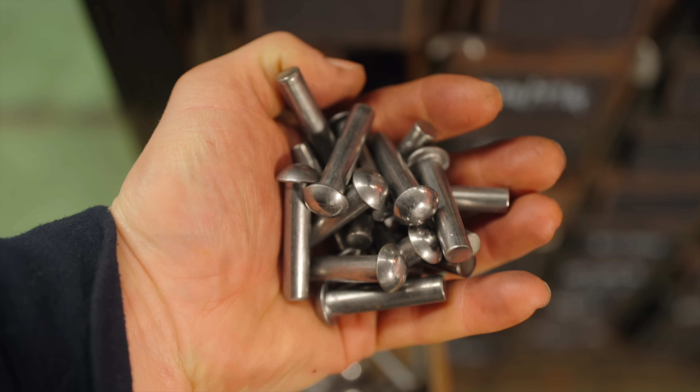The rivet is hidden in plain sight, but holds the world together. And I have been fascinated by them ever since I was a child. I remember walking through train stations, walking across bridges, looking at the structure of buildings, and being entranced by the millions upon millions of these that held together the structures of the past.

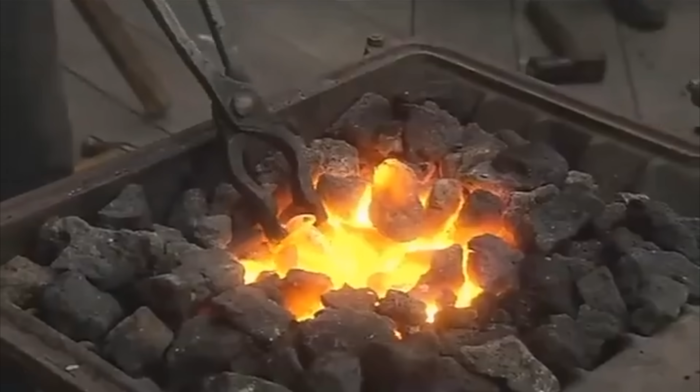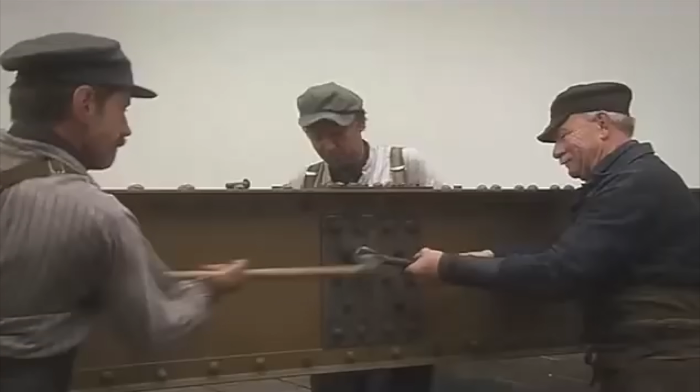As a young blacksmith, I first made them for the pivot on my tongs, but I always wanted to learn about how they were used in an industrial, structural way. I remember being completely entranced watching a documentary about how the Eiffel Tower was built. One chap on the floor below heating up the rivets in a forge, throwing them up to the team up high, and the heads smashed over with sledgehammers. And as time went on, it went from rivets being set with sledgehammers to hydraulics and pneumatics.

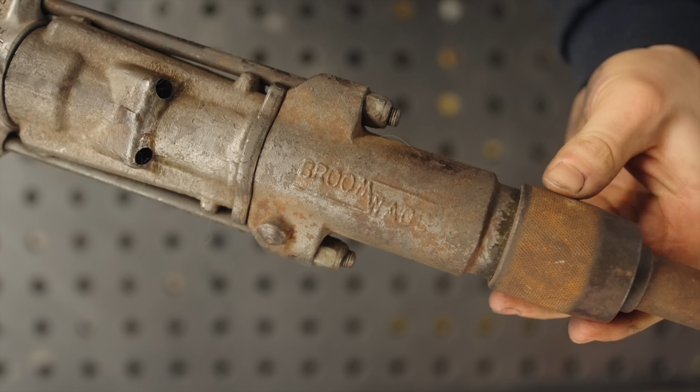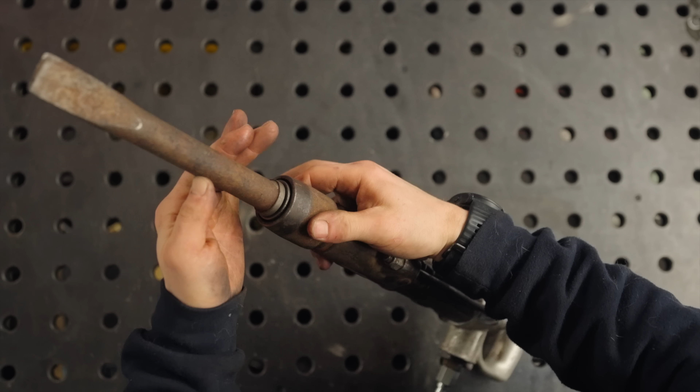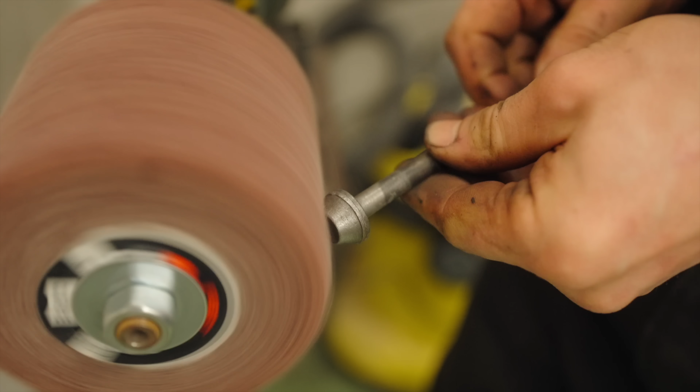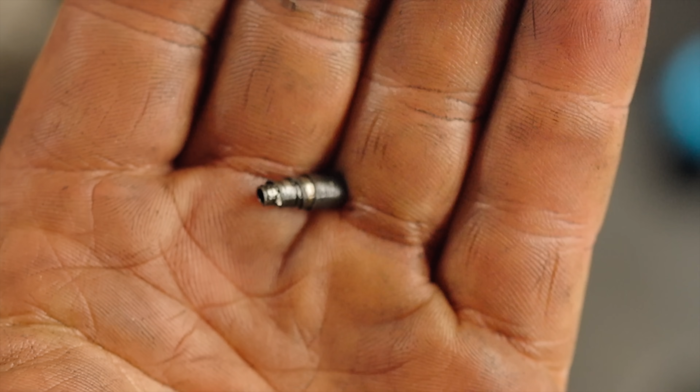Say hello to my little friend. I've been hunting for one of these for a long time. This is a Broomwade pneumatic hammer. Admittedly, it looks a little bit bigger in the pictures than it is in person, but I want to get this thing restored, up and running, and build the tools that we need to see if we can make rivets like they used to back in the day. Press this, chisel comes out. Feels remarkably smooth for its condition. Ooh, the insides feel good. No way. The springs are little spirals of flat stock.

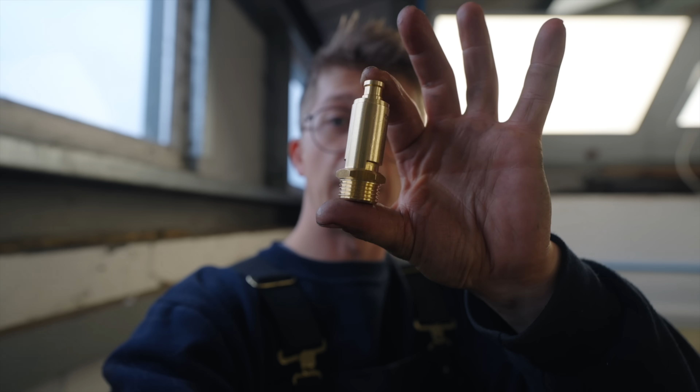It's cleaned up, and we've got to find out if this thing works, which is why I'm sitting on top of the compressor, because we need air, and you guys very kindly told me in the comments of our steam hammer video that the pressure relief valve I put on the receiver tank was too small, and so I purchased a much bigger one. I'm always very grateful to be learning from you guys. Turns out a pressure relief valve needs to exhaust more than the compressor can produce, which frankly sounds incredibly logical, to be fair.

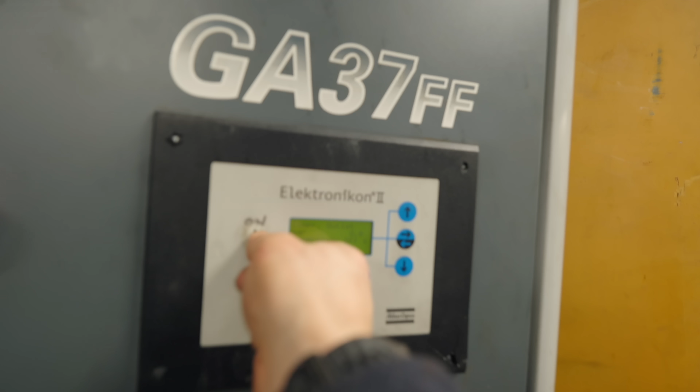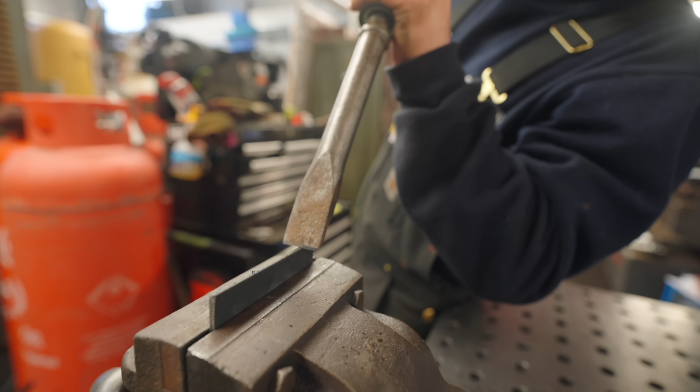And on here, on there. Sharpen this up real quick. So let's see how this thing performs as a cold chisel before we transform this into a rivet hammer. On with that. Oh! Say hello to my little friend. Oh, that's done nothing. That's pitiful. What? Not doing any hammering. Maybe I assembled it wrong. I think we've got to disassemble it.

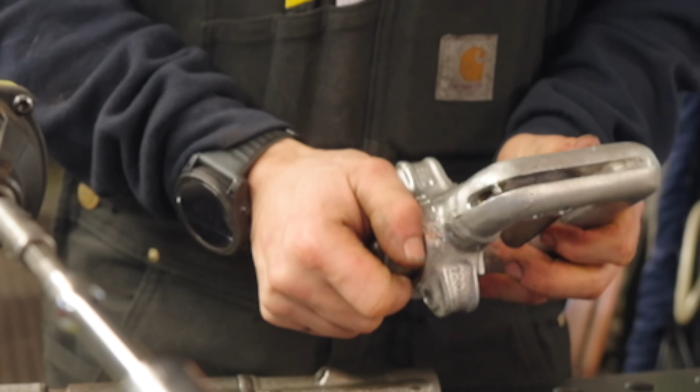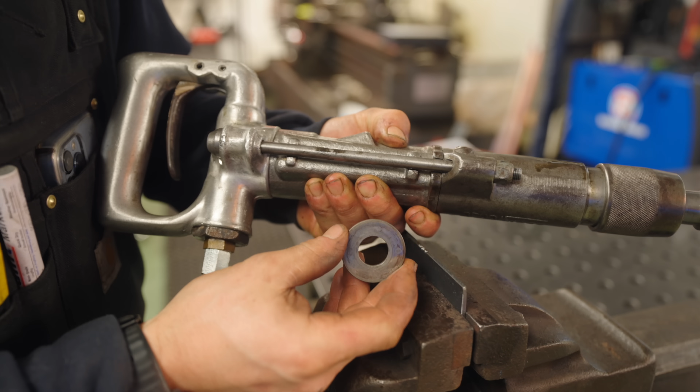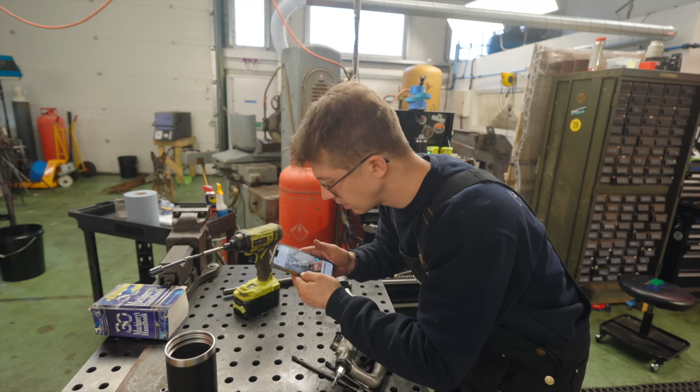I looked at the pictures. I think this needs to be turned like that. I have no idea if that's any different. It's not doing anything. Oh no! I put it together without this! That should be inside of there. That goes in there. Oh no! Boom. Take 3. Ah! Even worse! Try again. I'm looking at the pictures I took. I think I have it all together backwards.

I just found one of the little, I dropped it. One of the little ribbon springs that we saw earlier has broken. I don't know if I'm gonna have anything that'll replace it. Childproof containers. Oh my goodness. Definitely don't have anything that's gonna bloody well replace it, do I? None of these are gonna fit. That's not gonna fit. Nope. I think this spring is about to go as well. All right, how about this then? Will this work? Will it work?

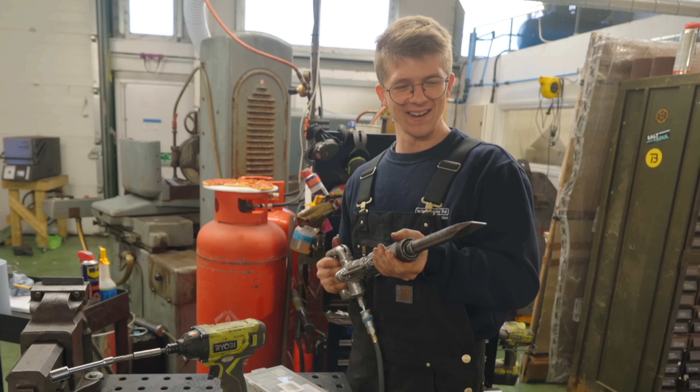Oh! That sounds more like it, baby. That's what it's meant to sound like. Look at that thing. That is a special type of feeling. The only thing it's missing is the smell of gunpowder. It hammers, and in its current state, chisels with some oomph. But is it enough oomph?

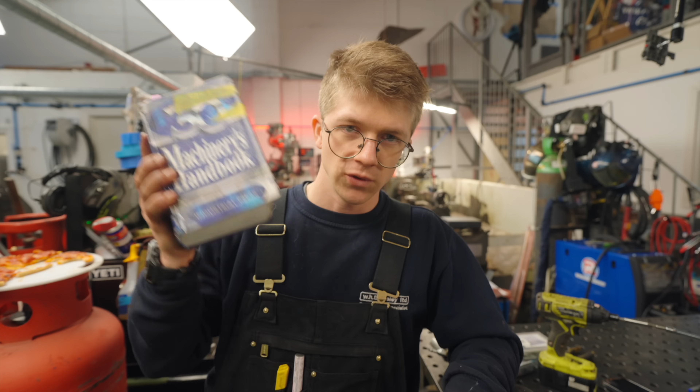That's the question. And so what I need to do is make up a rivet heading tool, otherwise known as a rivet snap. A rivet head is not just a rivet head. No. If you refer to your copy of Machinery's Handbook and turn to page 1779, we can learn a little bit about rivets. We can get some information about the type of joints and, important for this discussion, the different type of heads. The American National Standard calls this style a button head, and us Brits seem to call it a snap head. We can also see the dimensions of various components of the rivet, depending on its size.

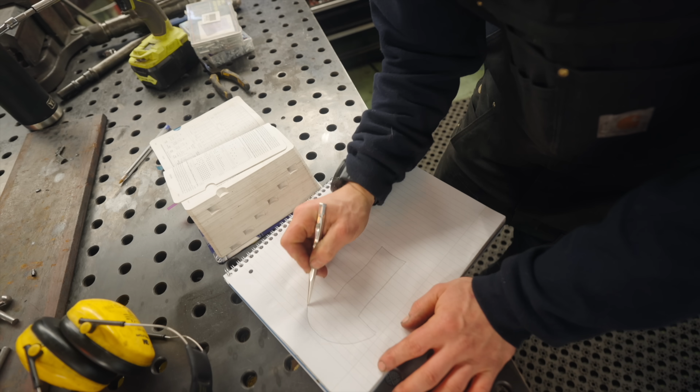Now here, I think we're going to start with a small little 8mm rivet, and this is the row for that, and that means it should be 14mm wide, 4.8mm high. And is that the same as the examples we have? 0.3mm off, but perfect on the height. We've got to make a tool that has this shank, and impressed into the end the negative of that snap head.

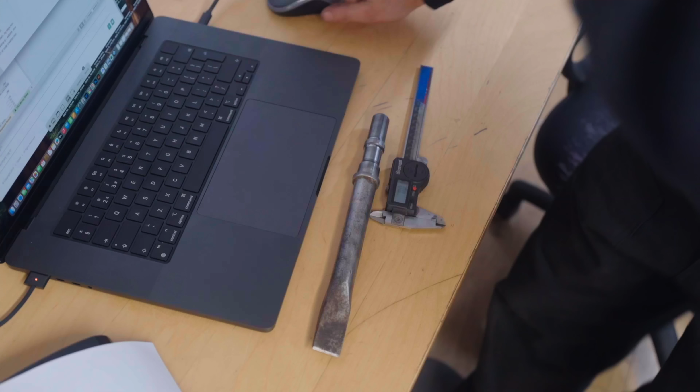Right, the actual engineers watching I'm sure are going to have things to say about these drawings. So just go for it, like rip me apart. But these drawings are built to give me everything that I need to be able to make this part on the lathe. All my dimensions coming off the end, and I know there's like standards for how you dimension a drawing and how you project different views and all of this, but these are things I haven't yet learned,

But based just on intuition, I was able to get this done, and this is going to be essential. So I'm gonna cut some material. I want something that's gonna get real hard. I want the good stuff. So what do we have? That would be perfect. That is H13. This is EN24. Need it just a hair larger than that. EN24 it is.

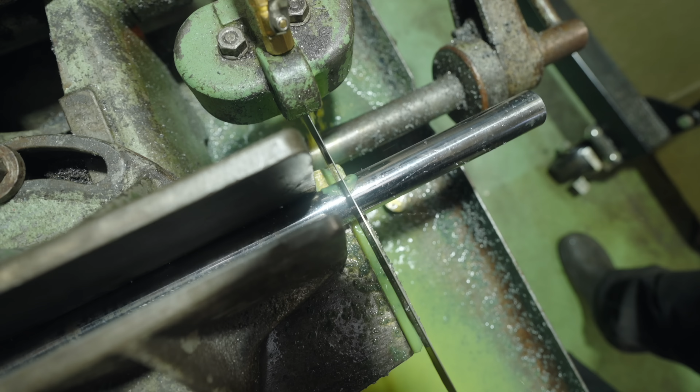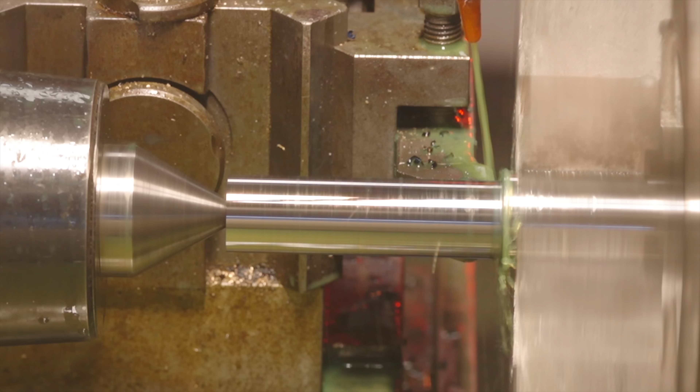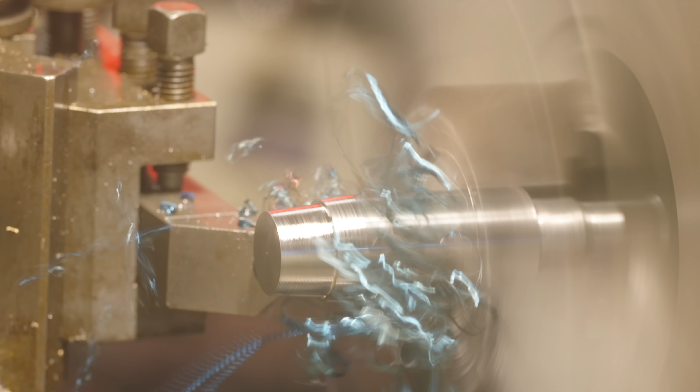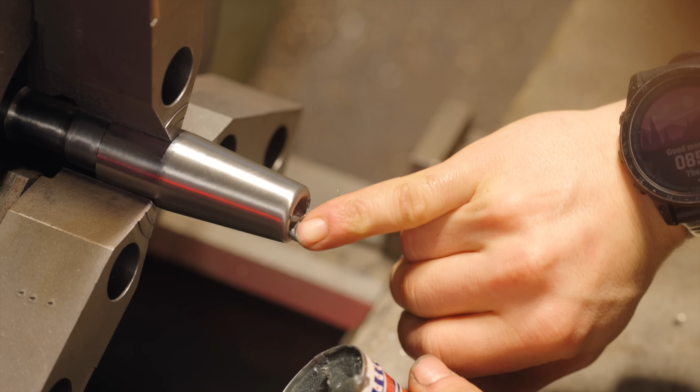Oh yes. Fits like it was made for it. Now we got to flip it around, put a little taper on it, and then a little divot in the end. Oh, yes, baby. I'm pretty happy with that. That's how she looks before heat treat.

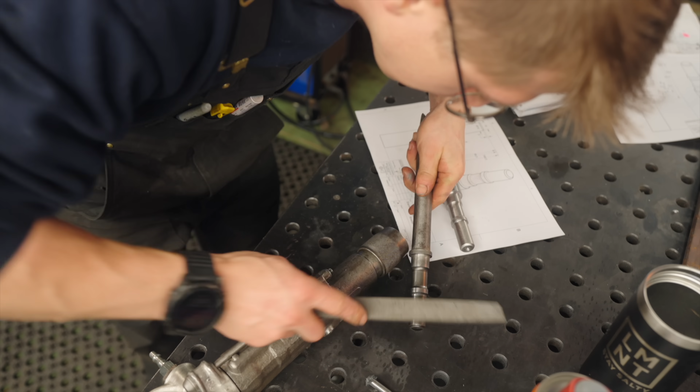Now, my assumption is that the original is hardened the whole way through and not just at the tip, but let's find out. Okay. Could have been wrong. Doesn't actually feel very hard anywhere. Soft, soft, soft, soft, soft. Wow. Okay, that's taught us nothing. I'm gonna harden it. There's no way something like this is soft the whole way through, so it's probably just fully hardened, but just not very hard.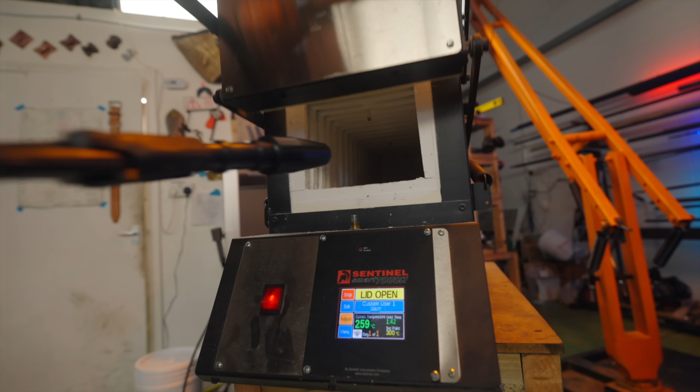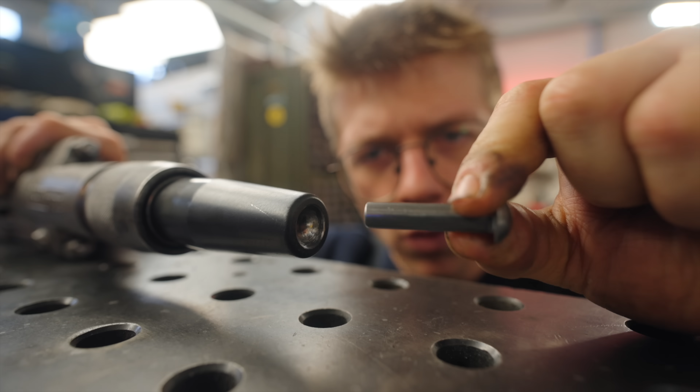In she goes. And out she comes. Into the temper. Mmm, scrumptious. I do love that oxide quenched finish. Oh yeah. We've only got one half of the equation sorted. We have a means of hopefully forming the head of our rivet. But if we just supported it on an anvil, we'd squish and flatten the backside. We need a bucking bar.

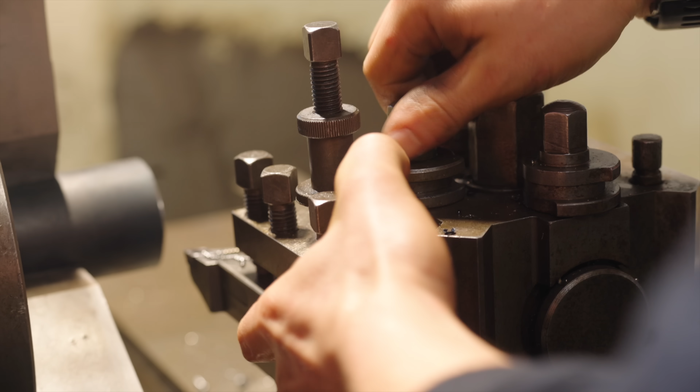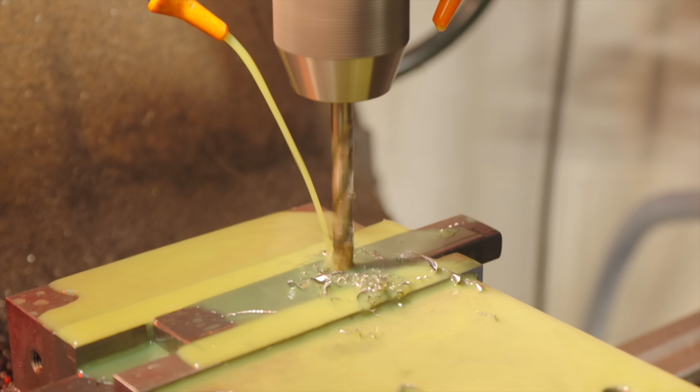This stuff's 1040 EN8, so we can do it with a water quench. We need holes. While most of the video is riveting, this is boring.

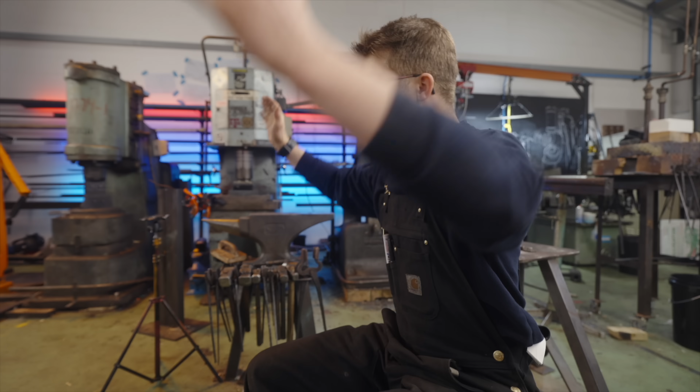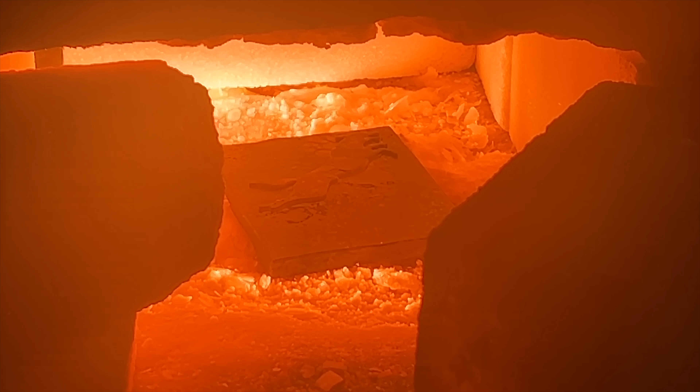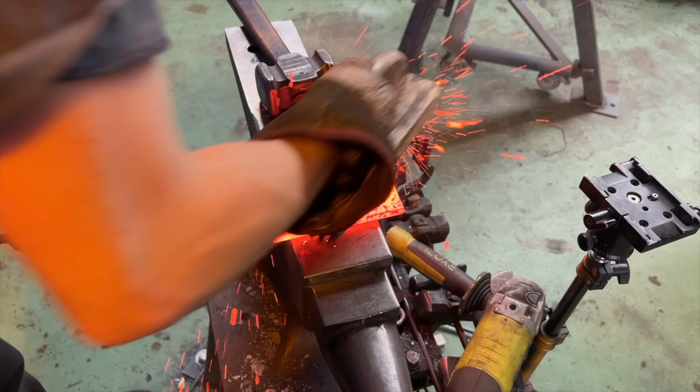It's side project time. You might know, one of my hobbies is playing with dogs. Hi, how you doing? We recently hosted a PSA trial, dog sport competition, and we wanted to make some special, kind of informal trophies. So I whipped together a design, came over to the Wazer, of course, and cut out some silhouettes, where then I had the idea to forge weld those sheet steel silhouettes to some bits of flat bar, and I am bloody chuffed to bits with the result. What a cool way of making up simple plaques or simple trophies. It's not Damascus steel, but I think the result is a very cool imprint. That is exactly what I was hoping to achieve.

And they were awarded to the Decoy's Choice Dog and the Handler's Choice Decoy. Now the decoy is the person that gets bit by the dog. And so, of course, I was also out there getting bit by dogs, wearing a big old bite suit, running around like a clown and having a great time.

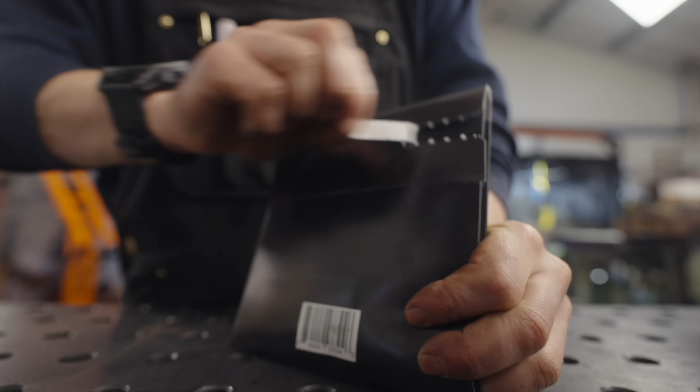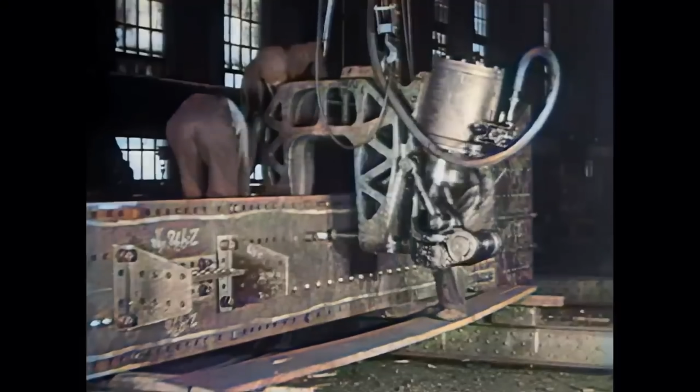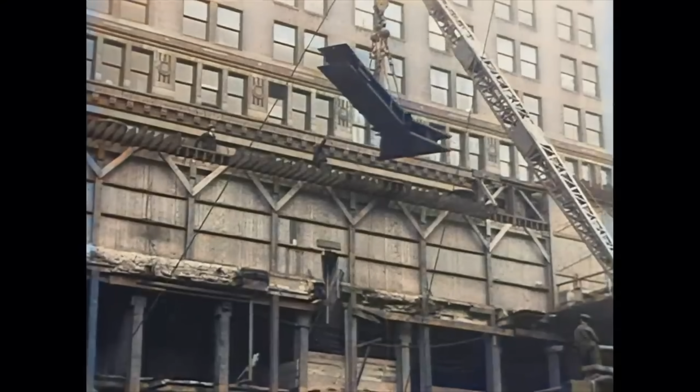Let's get back to it. This is going to be a little itty-bitty test. Nothing like the scale of riveting that is done and has been done. The thing that comes to mind is this incredible old video of the Empire State Building's beams being assembled. These things were riveted together, each beam with hundreds and thousands of rivets before being brought to Manhattan to be made into the Empire State Building.

And of course, let's not forget the thousands and thousands of rivets that hold together every aeroplane that you have ever flown in, or that flies in the air. It's all held together with rivets. Now, how does a rivet work? And what's so bloody good about them?

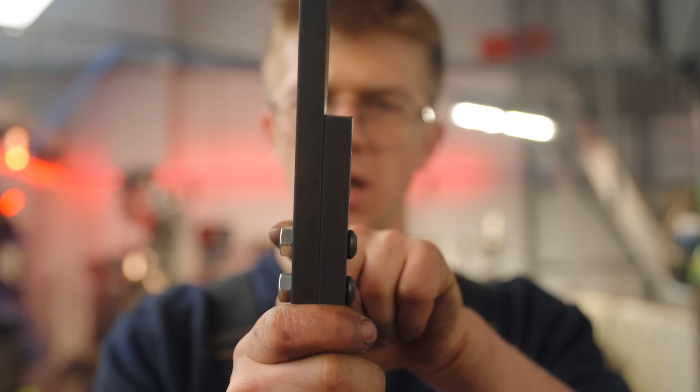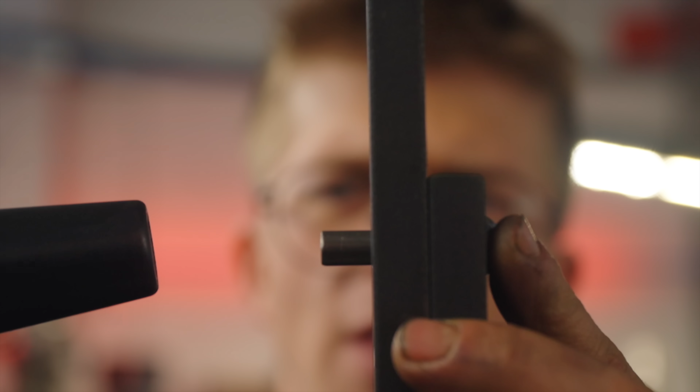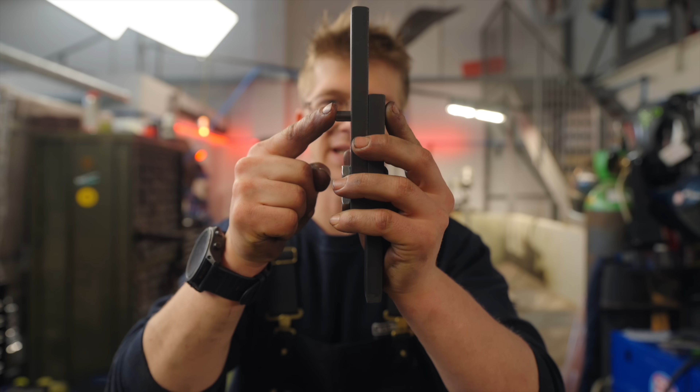Well, unlike a nut and a bolt, the rivet is permanent. It has one end upset, formed over into a head out of its own parent bar. It is pushed through a hole, and then, hot or cold, in our case hot, the final end is hammered over and driven over, swelled to create a permanent fixing. And the added benefit of a rivet is, because we're going to heat this, and because we're going to force it over when it's hot.

Yogo, no. That's very expensive. That's a pure nickel sheet. You can't be chewing that.

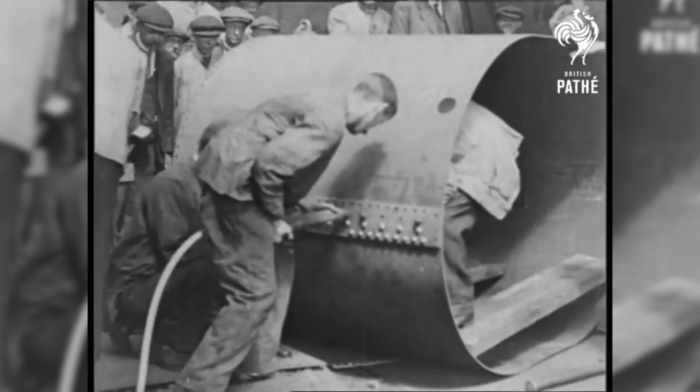Refer back to the explanation about the coefficient of thermal expansion in the titanium and steel Damascus video. What happens when the rivet then cools down? It shrinks, pulling harder on the joint, and until they shear off or corrode away, they are locked there permanently. Let's find out if this rivet gun is strong enough for these rivets.

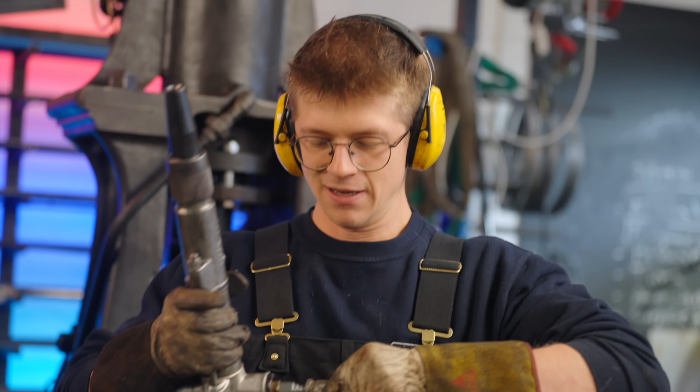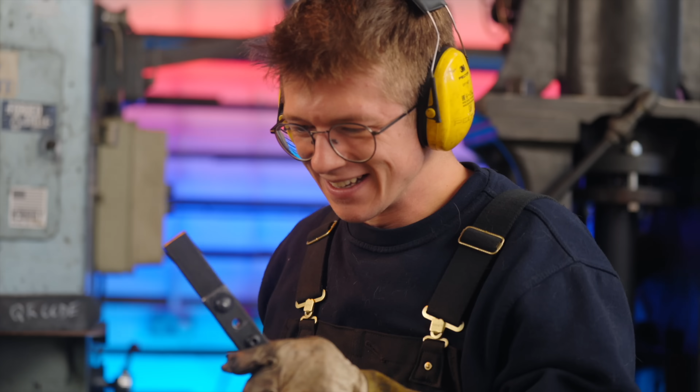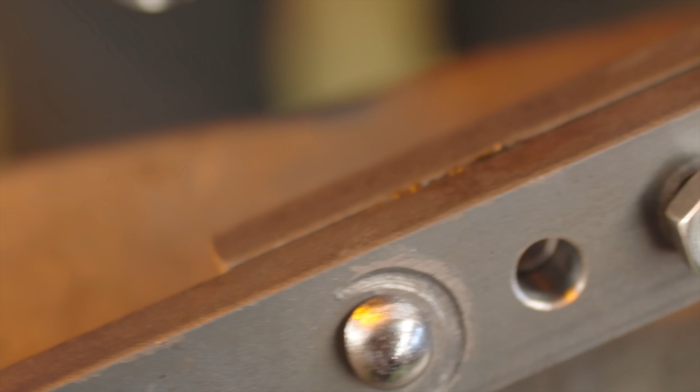Yes! Kind of. Slight problem though. Have a look at that, Jamie. That head is not properly formed. The end of my rivet snap, this flat surface, has imprinted on it before the head is fully formed to the 14mm diameter that the specification calls for. So that means that I didn't leave enough of the parent bar poking out of the hole to be able to form a large enough head. We needed just a little bit more length, and gentlemen, we did not have it.

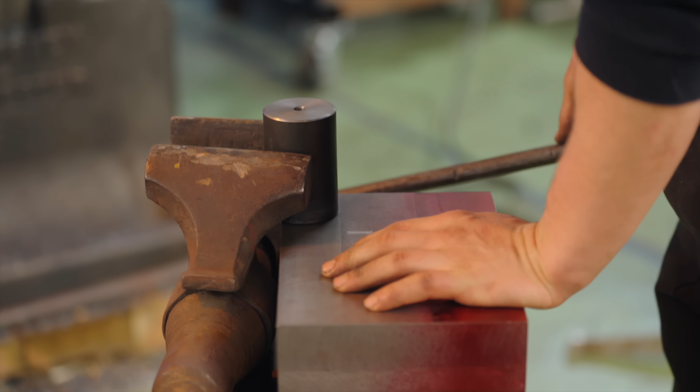I don't have any store-bought rivets that are any longer. We're gonna have to make our own. Yeah. That one might actually be a little bit too long. I dare say, that is an acceptable looking rivet. Not all the way perfect, but pretty close.

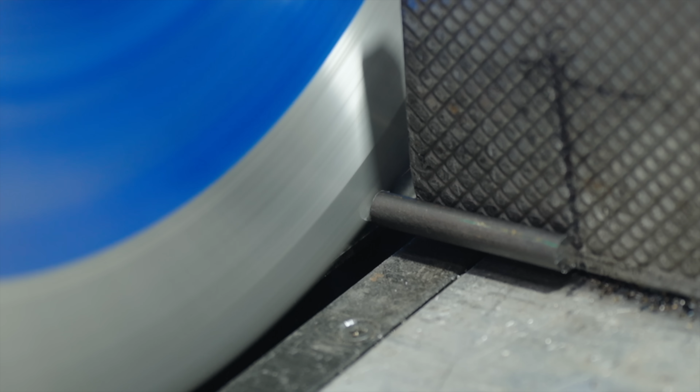Oh no, look at that disgusting off-center head. Bit off-center as well. Oh yeah, it helps when the pressure's on, doesn't it? Yeah, that's much better. Yay. Did this one go straight? That's more in the middle.

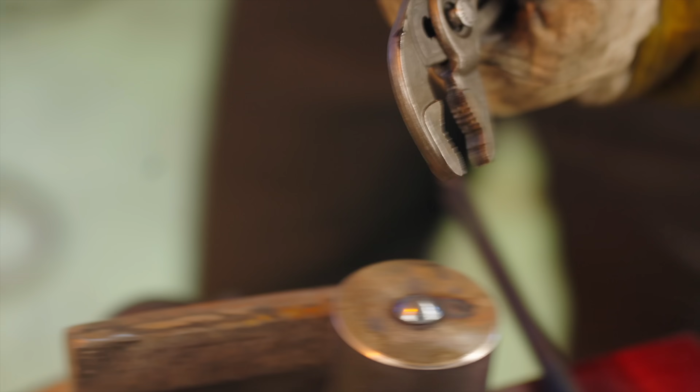The only 8mm stock that I had on the shelf is what is called hot rolled material. This is hot rolled stock. As the name suggests, it is straight out of the rolling mill after a heat with no further finishing. The result is it is never perfectly round, and the tolerance is actually quite large. So it could be plus or minus 0.5 millimeter, say.

This, on the other hand, is cold rolled stock. So after the hot rolling, they clean off the scale and then roll it again cold, and the finished piece has a much closer dimension, much finer tolerances on it. This is hot rolled steel, that is cold rolled steel, and this is Rick rolled steel.

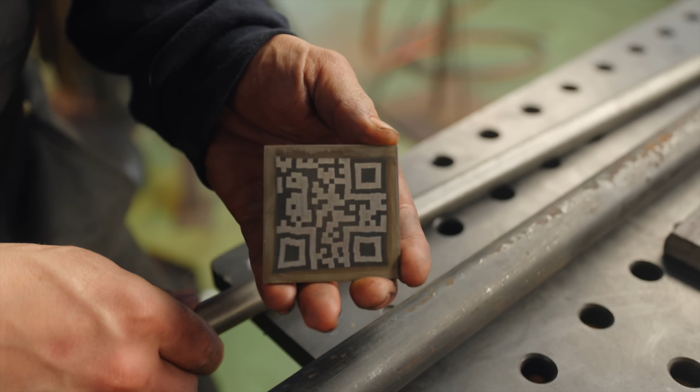So let's measure the actual bar we're using. Oh my, look at the variation. As small as 7.59, as big as 7.89. It's oval and dramatically undersized.

Most of the time I find hot roll stock to actually be a bit proud of the given dimension, and in my genius, I assumed that to be the case instead of measuring it, and I drilled that 8.5 millimeters so that we would have the clearance for it to come in and out. But it seems like that was an oopsie, because I think we've gone too far on clearance. It wobbles too much, and so it doesn't take a lot for it to tip over to one side or the other. So all I've got to do is re-drill that hole out just a little bit smaller. This was 8.5, this one is 8.2.

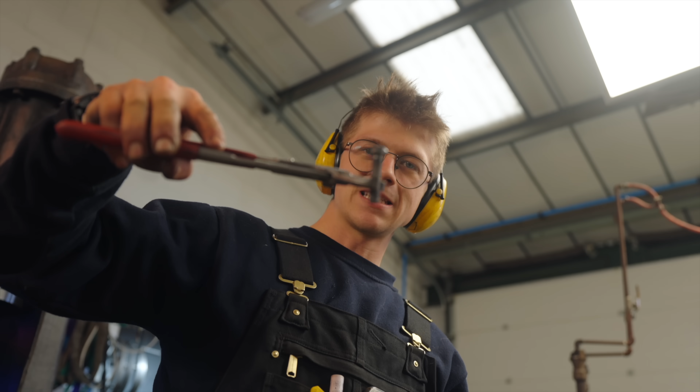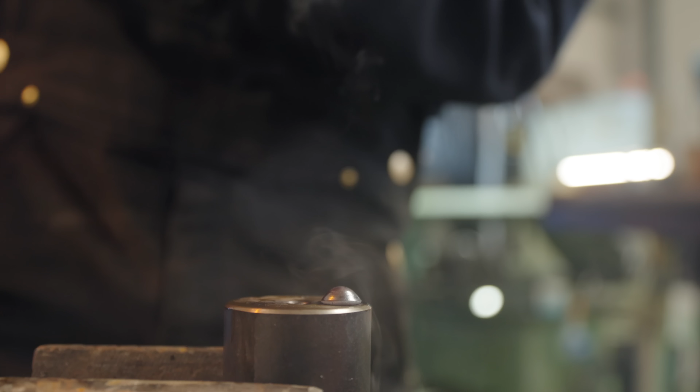Hot roll stock is a bit of a nightmare to get out. Oh, we're ruining it. Still a bit off center, but this one is approaching close enough that you can just call it handmade, and it adds value. See if we can clean up that hole a bit. Oh, much nicer. Crap! Even worse.

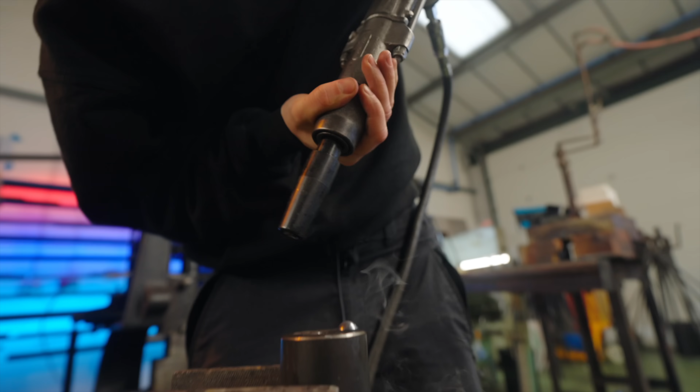Can I give it a go? So I've got a magic hand. Yes, come on. Whoa! Jamie! Easy does it. Whoa! You gotta be joking. Damn it, it does look really good.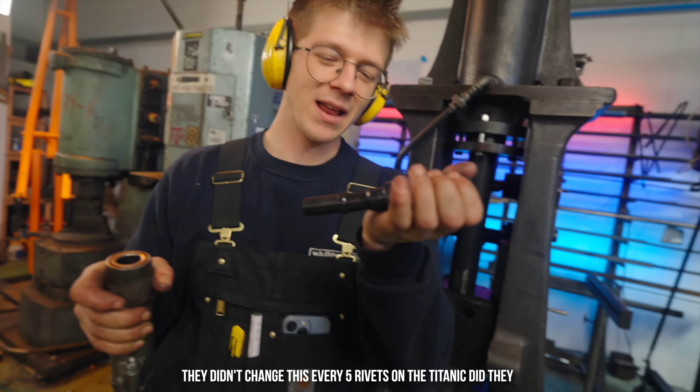I just want to see how this thing is holding up. It literally looks brand new. Good lord. Yeah, you've only done about 6 rivets. I know, but they didn't change this every 5 rivets on the Titanic, did they? I know, but if I'd done a crap job of making this, you know, it might have been showing some wear. And it still looks and fits really well. These ones have been cut a millimeter shorter.

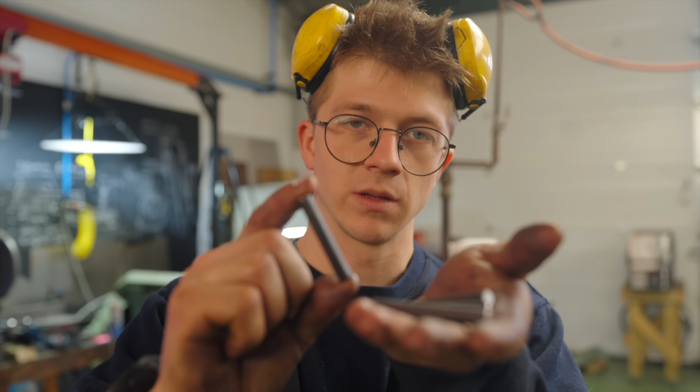Yeah, it's where the word crap comes from. It's crap. It's scrap steel. Accuracy through volume. If we just make a ton of rivets, eventually we can find 4 decent ones for this little assembly. Literally getting worse.

Well, it looks pretty good from the top. You be riveter, I be getter-outerer. Whatever your rivet looked like, it now looks like crap. That's not perfect, is it? Get out of there! This is delightful, Jamie. All right, I'm just gonna cut it off.

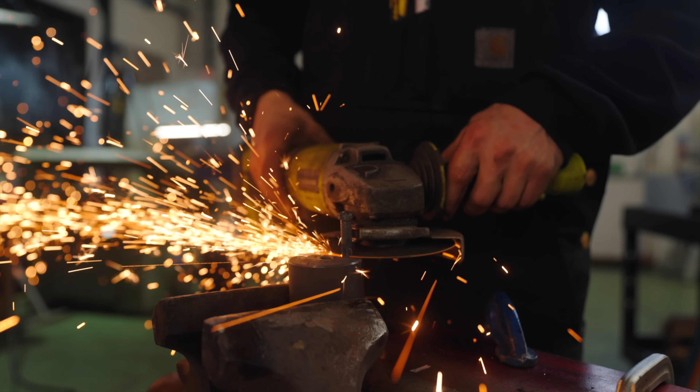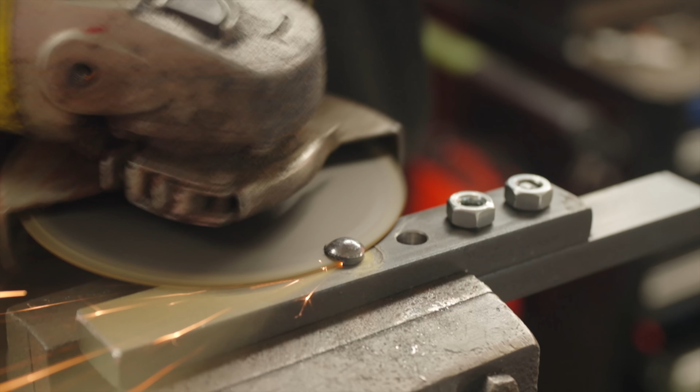So, what would happen if you were up the Eiffel Tower and put a bad rivet in? How would you get it out? You would take your 1881 cordless 4.5-inch angle grinder with a 1mm zip disc, grind off the head, then knock it out. You can see how the shank deformed as that other head was riveted since it was all hot.

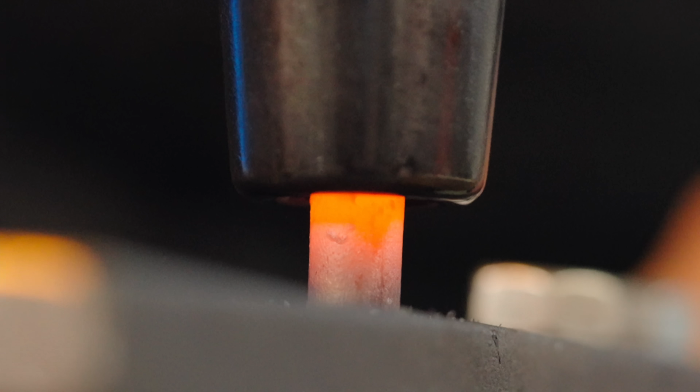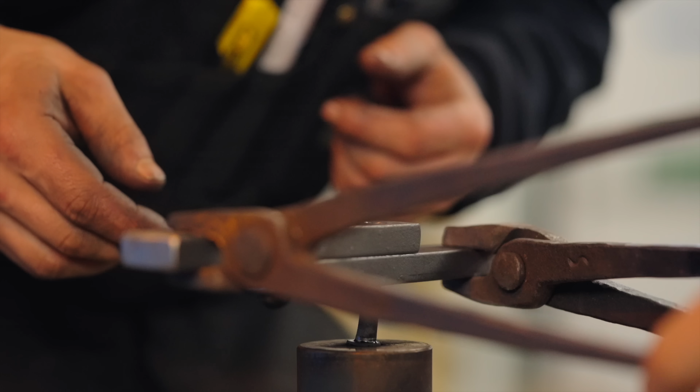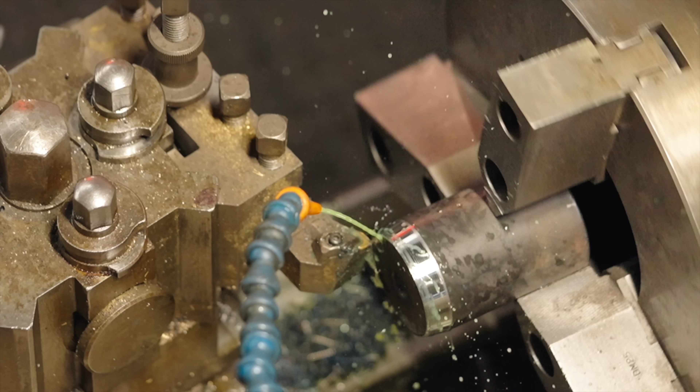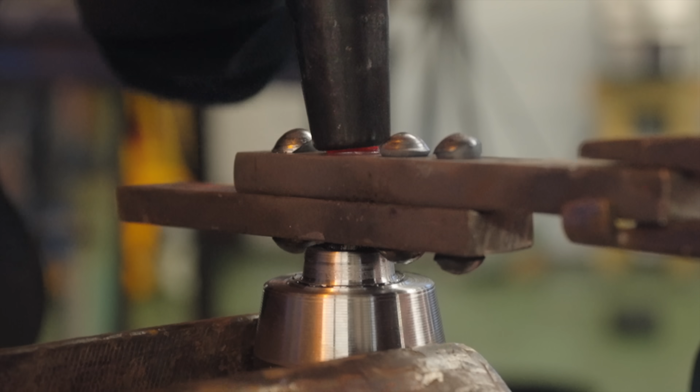That's hard one-handed. Okay, holding and riveting, both one-handed, not so easy. Ew! No! I suck at this! Uh-oh. Problem with our bucking tool design, it's too wide. Looks a little bit more like it. Kind of decent. I don't think we're going to be able to go work for Boeing, Jamie.

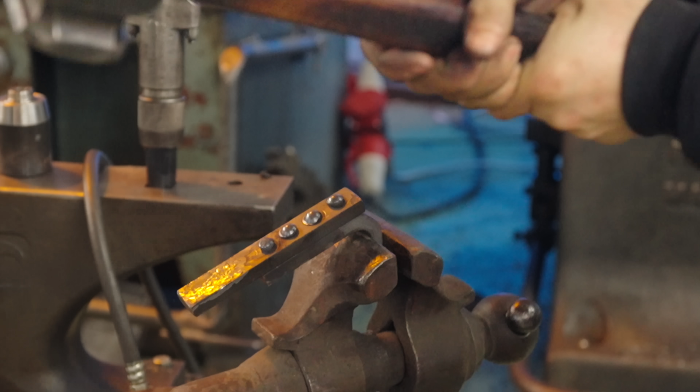Shall we see if we can break it? Yep, even ugly rivets are pretty strong. This is why I love rivets. They're strong as can be. Now, what I really want to know is how big of a rivet will our rivet gun allow us to make? That's going to need some more tooling. That is also going to need some more time.

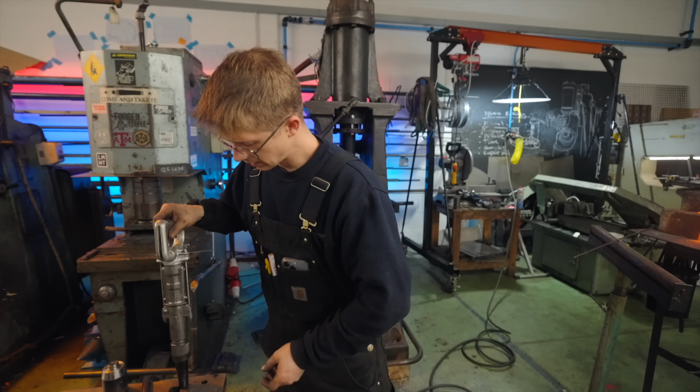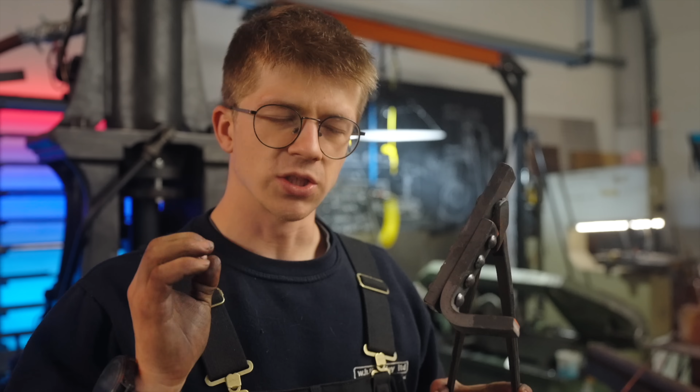But the purpose of this video was beginning the process of troubleshooting this entire process. And we have learnt good bar stock, important. Correct clearance on the hole in the backing bar, as well as the hole in the workpiece to be riveted, is very important. In addition to having a competent operator in the workplace. We can do something about the first 2 problems, but the doofus on the other end of the trigger, I don't know. So we're going to need to get to more troubleshooting to dial this process in, and we're going to need a project to do it on.